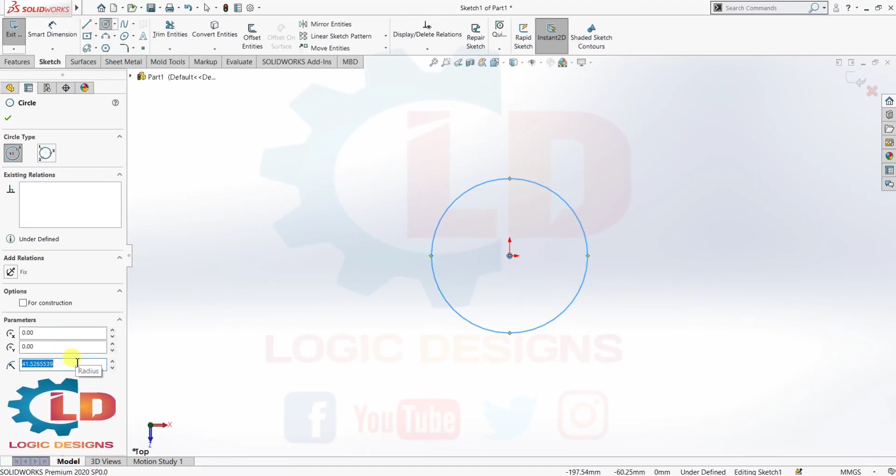Now we are back in the 3D modeling working interface. Select first the top plane, go to sketch and select the sketch option. Now select circle, first create one circle. Now put here dimension radius 32. Now using smart dimension, diameter is 64 mm.

Now create one center line from UCS. Put your smart dimension 41 mm, because we need a reference point to create another circle of 22 mm.

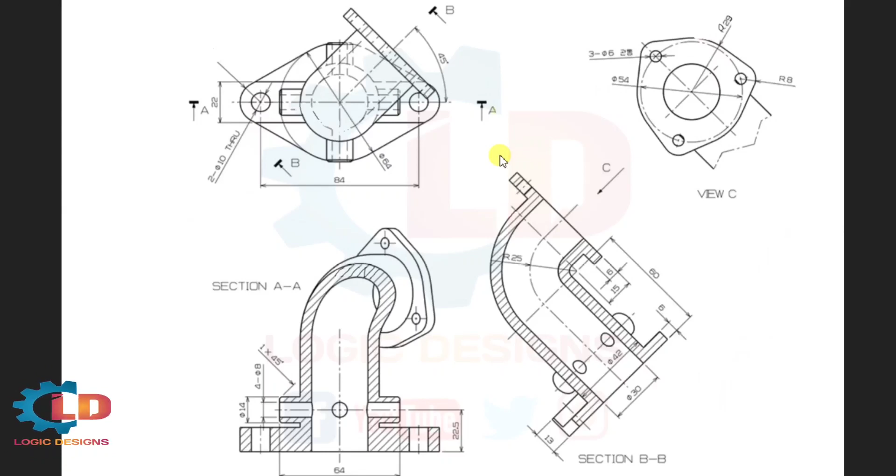Now let's move to the working interface and create one circle. Select circle first and select this point as a reference and put here radius 11 mm. Now go to smart dimension and put here diameter 22 mm.

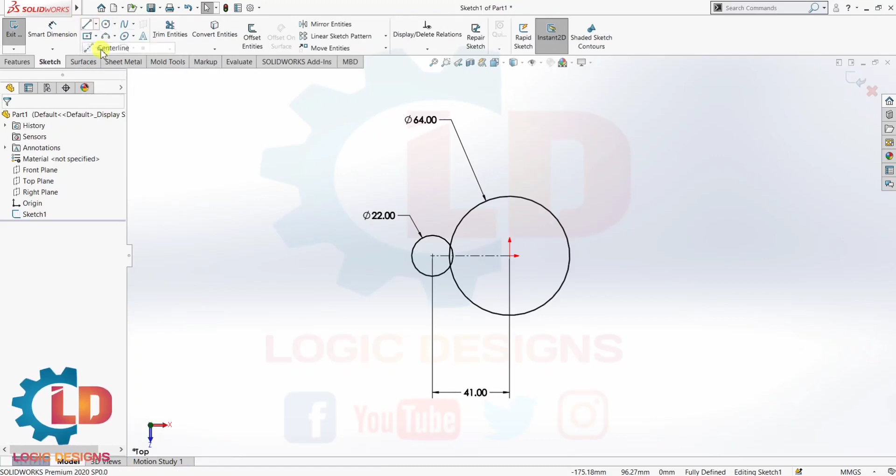Now select line, center line, and create one vertical center line for a reference.

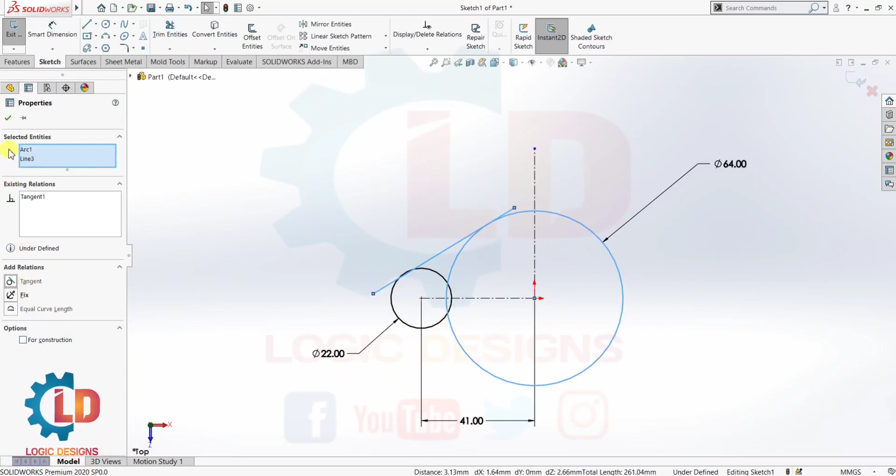Now adjust the dimensions. Here I am adjusting dimensions. Now go to line again for tangent. Select line and create one random line. Now hold this line and hold this circle and select tangent for a relation. Now select this line, select the circle, and select tangent.

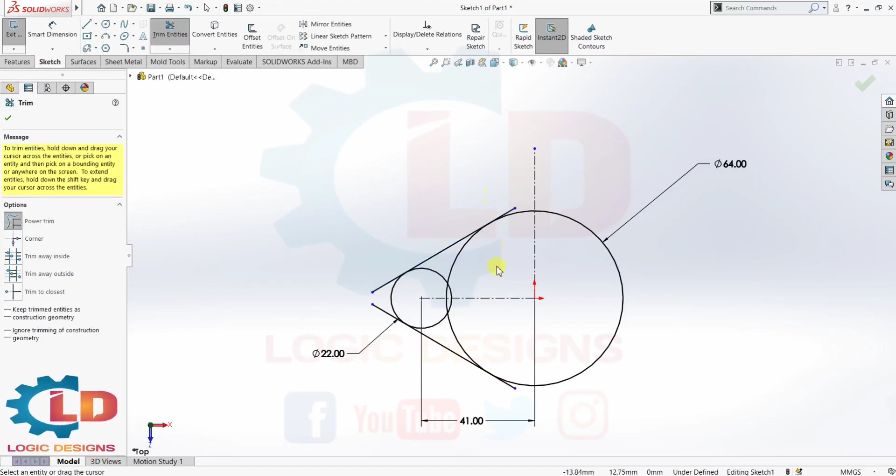Now the relation is added. Go to mirror entities, select this line, and mirror about the center line. Now trim out all unwanted area. Select trim and select the unwanted area.

Next, trim out the bottom side also. Now add relation to this blue line, because we need a fully defined sketch. Go to fully defined sketch and select this line. Now press OK, now our sketch is fully defined.

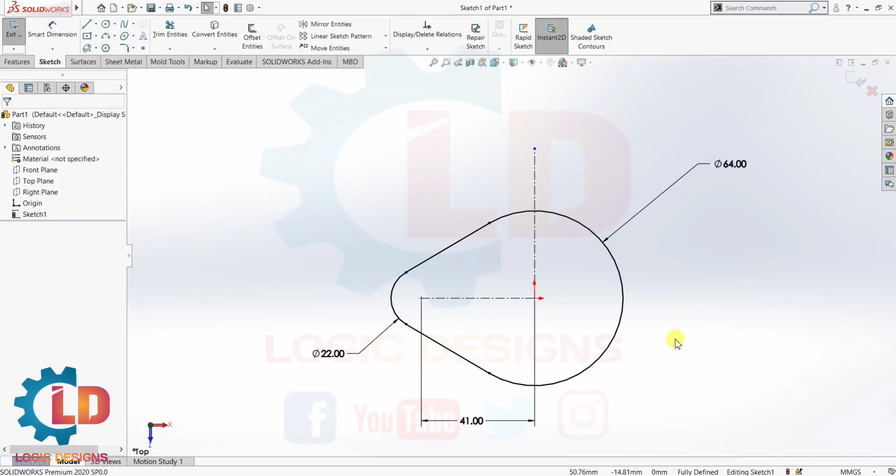Next, mirror all required area. Go to mirror entities and select all required area. Select these curves and lines and mirror about the vertical line. Now the portion is created on the other side of the vertical line. Now we have the bottom plate of this 3D model.

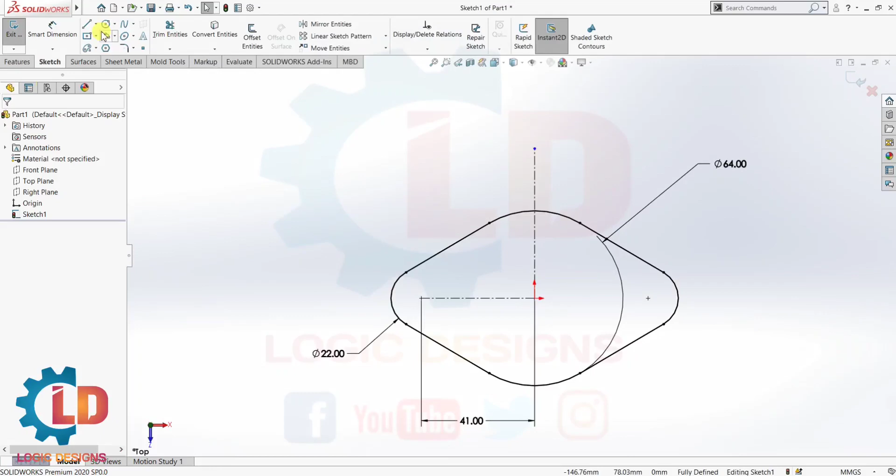Next, we need to create slots from this 3D model or base plate. Select circle and create one circle from UCS and put here 21 mm radius. Now go to smart dimension, select this circle, and dimension is diameter 42.

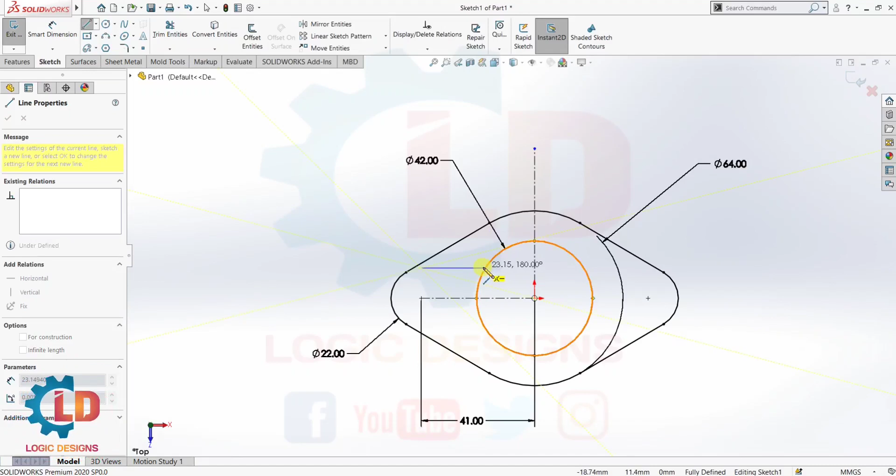Next, create one horizontal line, up to this circle. Now go to smart dimension, select center line and select this line, and put here dimension 11 mm.

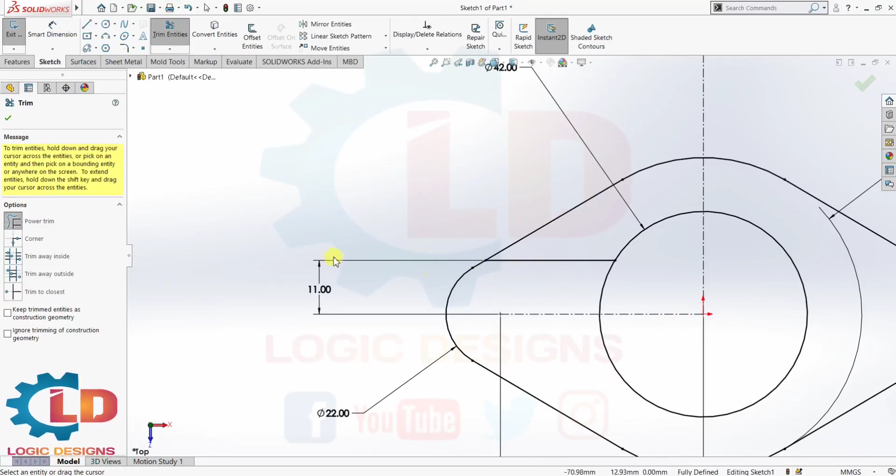Now extend this line. Now the line is extended. Now trim out this line. Next, mirror this line to the bottom side of the center line. Select this line, mirror about center line. Now the line is created on the bottom side also.

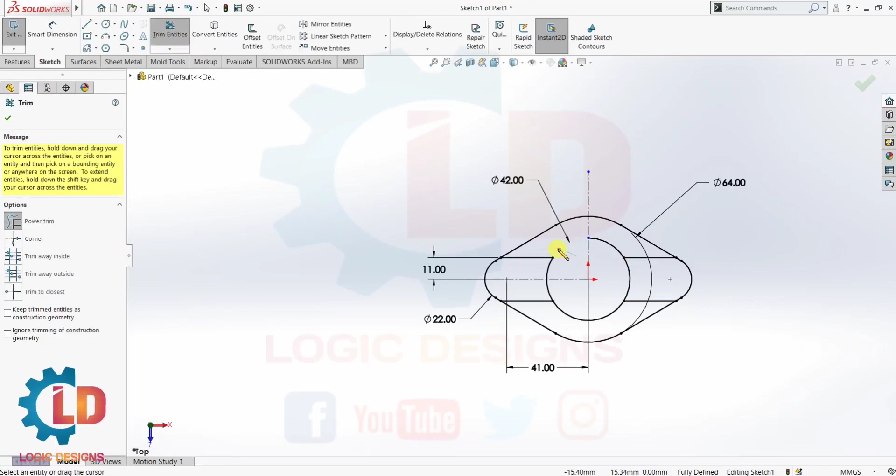Now again go to mirror entities. Select these two lines and mirror about the vertical line. Now the line is created on both sides. Now select trim and trim out all unwanted area. Now our base plate 3D model sketch is ready.

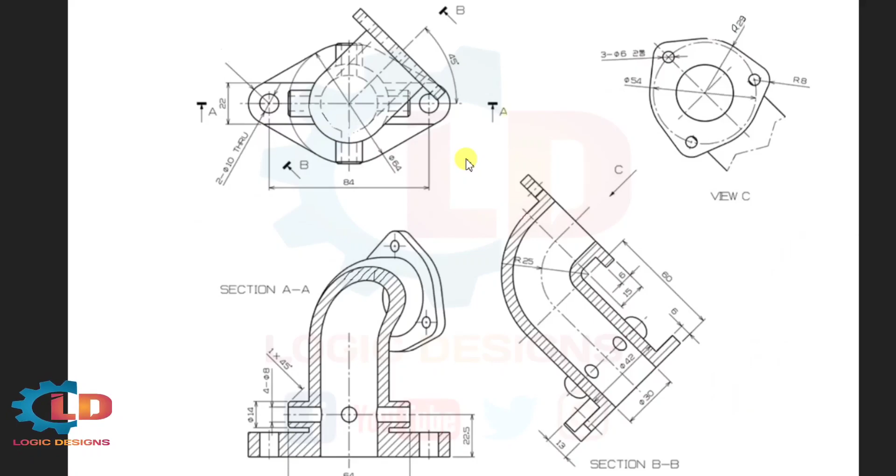Now we extrude this base plate in two parts. First part extrude up to 6 mm and second part extrude up to 13 mm. Let's check it out. First select features and select extrude boss base.

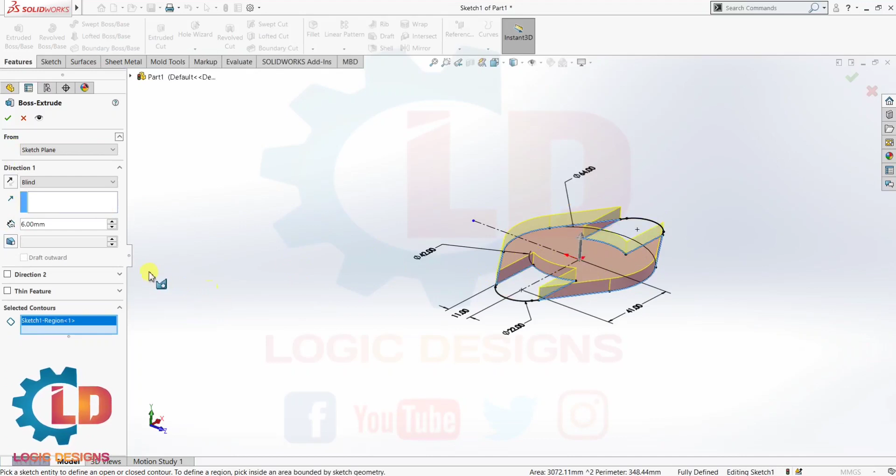In its contour select the center part, select this one and put here 6 mm distance. Here I am putting 6 mm distance. Click on OK. Now next we need to activate the previous sketch to extrude up to 13 mm.

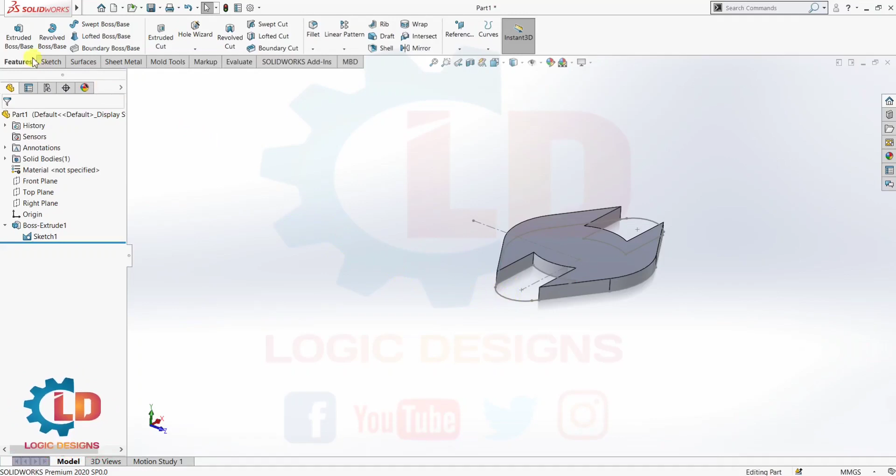Before that, go to the tree and select sketch 1 and select show sketch, select this eye icon. Now the previous sketch is shown. Now select extrude boss base and select this curve. Now this is randomly selected, so go to the sketcher tool and delete this one.

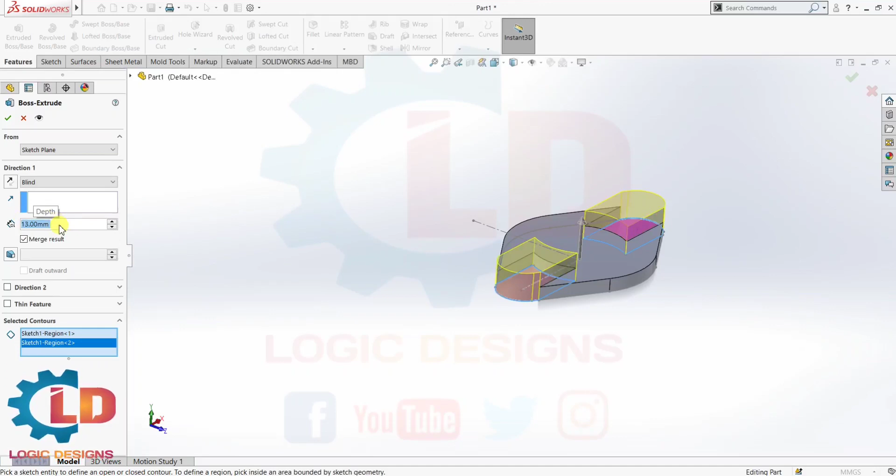Now select manually these two portions and put here 13 mm distance. Now our base plate is created. Now hide this sketch. You can see here our base plate.

Next, we need to create this elbow. The angle is 45 degrees, clearly visible in the top view. For creating this elbow type, we need a new plane, and please read all drawing annotations or dimensions before creating this elbow. This is a hollow tube elbow, clearly visible in section views.

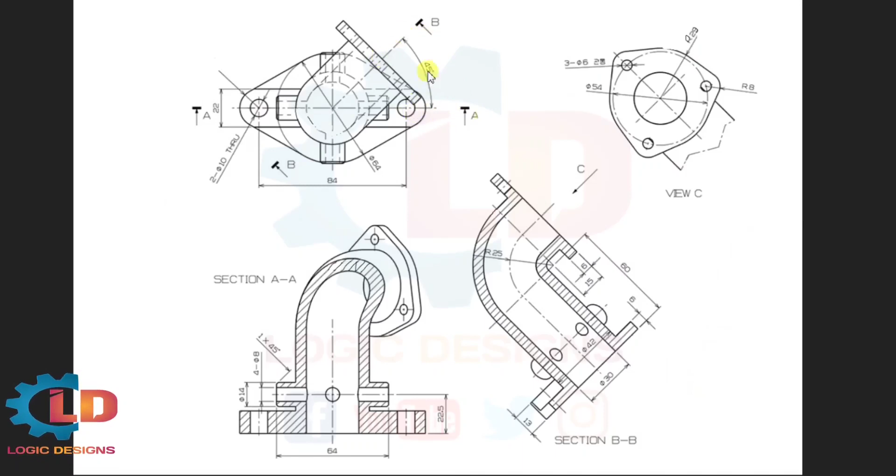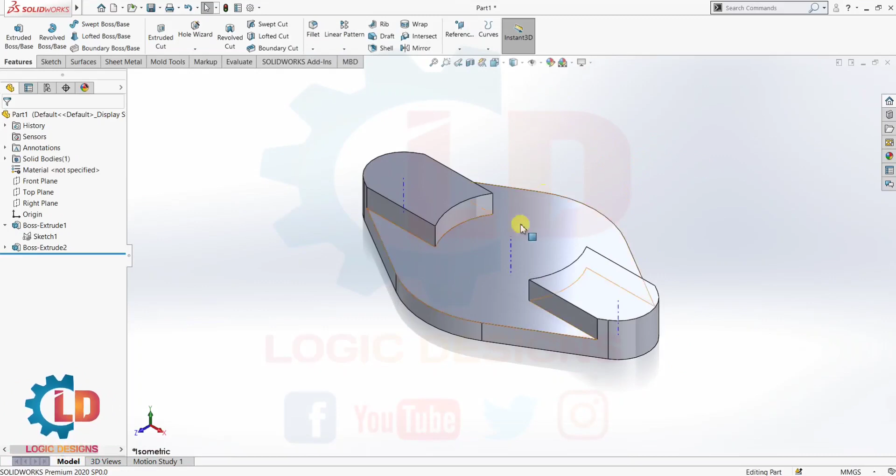Now here I am creating this elbow hollow tube on a new plane. Select this eye icon and select view temporary axis. Now the temporary axis is visible in our 3D model. Now go to reference to create a new plane.

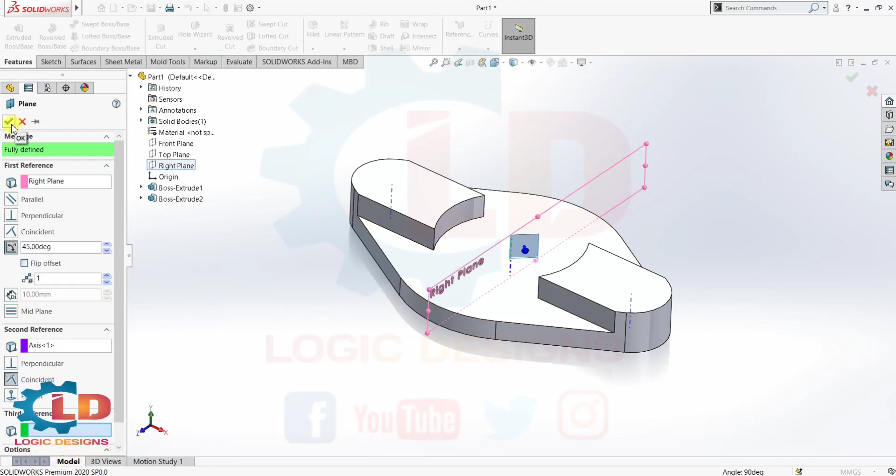Reference new plane. Put here references. Select right plane first and put 45-degree angle. In the second reference, select this vertical temporary axis. Now plane is visible. OK, now plane is created at an angle of 45 degrees.

Now extend these points. Here I am extending these points to clearly visualize this plane on the 3D model.

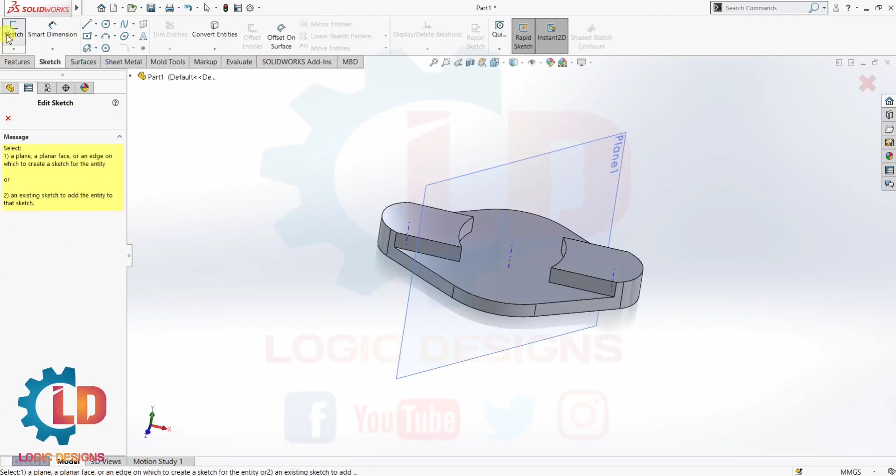Now go to the sketch. Select this plane, now sketch is activated. Put Ctrl+8 for normal view. For proper viewing angle, we need normal to view.

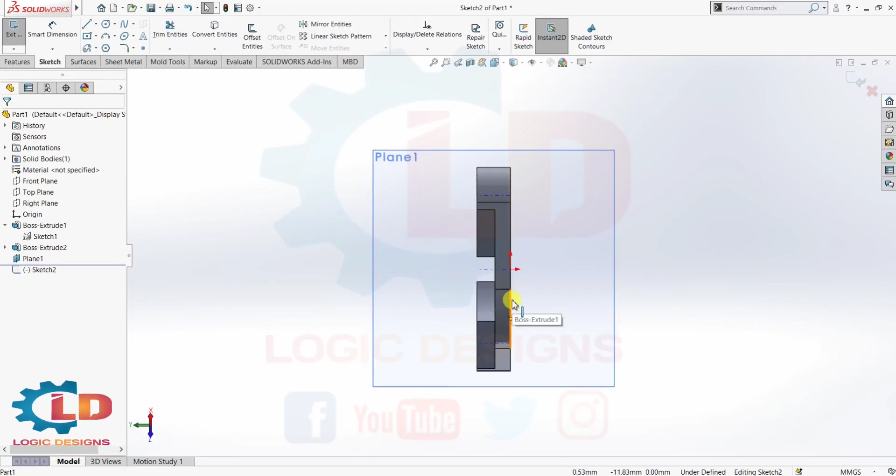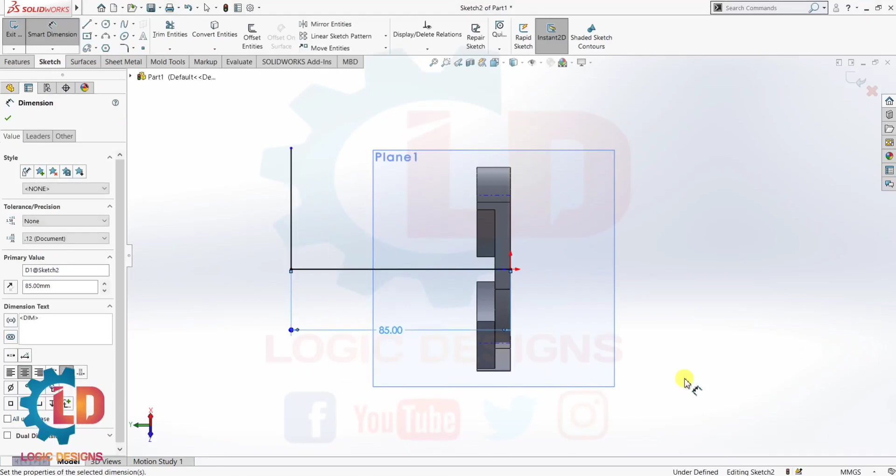Now select line, line is selected. Now create line from UCS, create one horizontal line and one vertical line. Now go to smart dimensions and put dimensions here. As per our 3D model, horizontal distance is 85 mm and vertical distance is 40 mm. Put here 40. Now our sketch is fully defined.

Now select sketch fillet and select this line, put here 25 mm radius. Now create this elbow section.

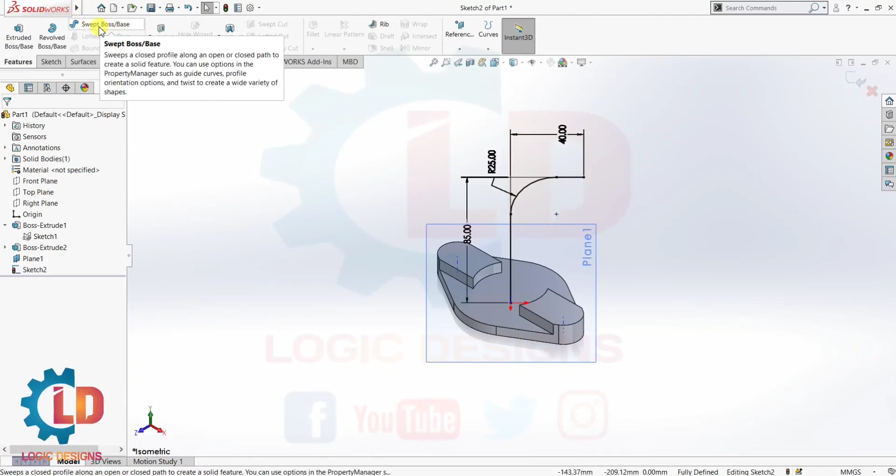For that we need to use the sweep command for creating this elbow. First adjust the viewing angle and go to features, select swept boss base. Now sweep is activated, for profile and path select circular profile, and select the path, this line. Now put your diameter 42 mm as per our drawing. Now sweep is created on a base plate.

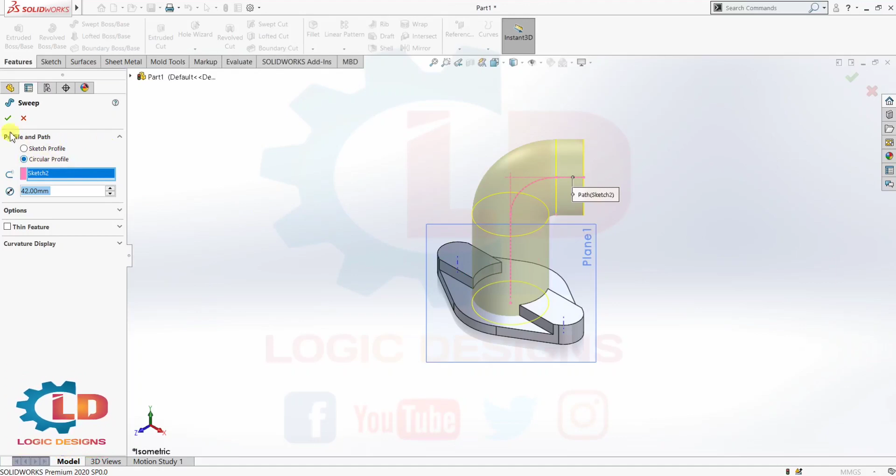Done, this is our elbow at a 45-degree angle. Now you can see the elbow is created in a solid state, but as per our drawing the elbow is hollow.

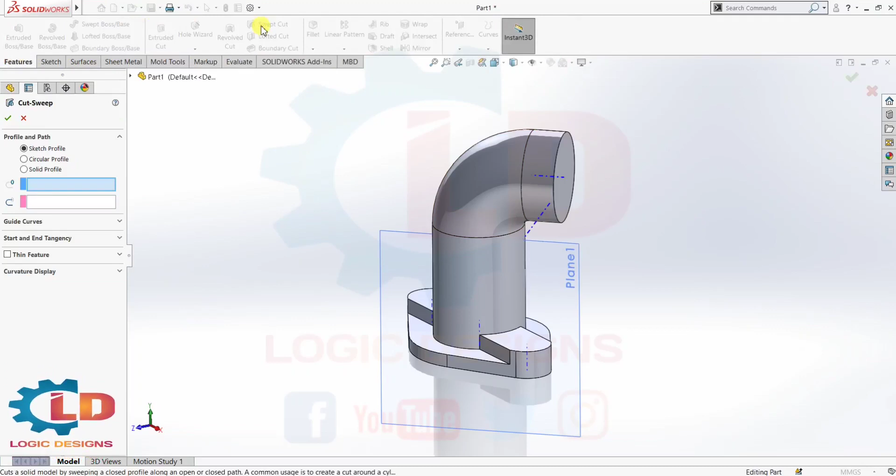So for that we need to use swept cut. Go to features, select swept cut. Now again profile and path, select circular profile and select path.

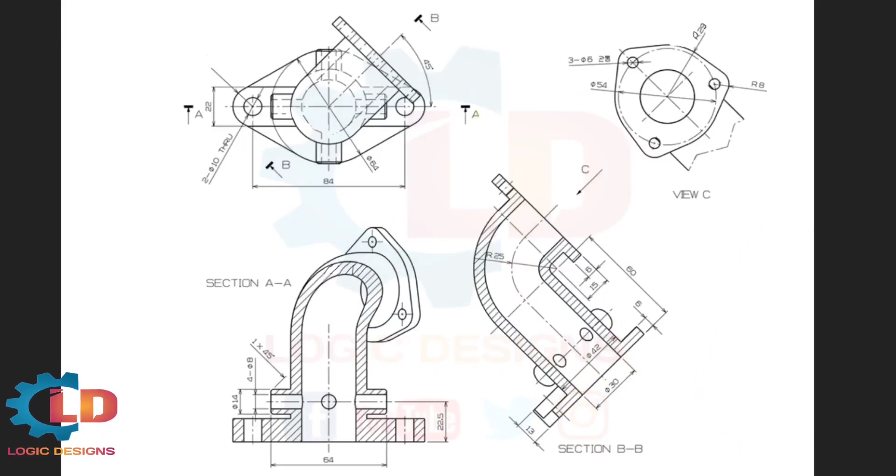Go to the tree and select sketch 2. Now swept cut is activated, put here diameter 30 mm. Now you can see the solid tube is converted into a hollow tube.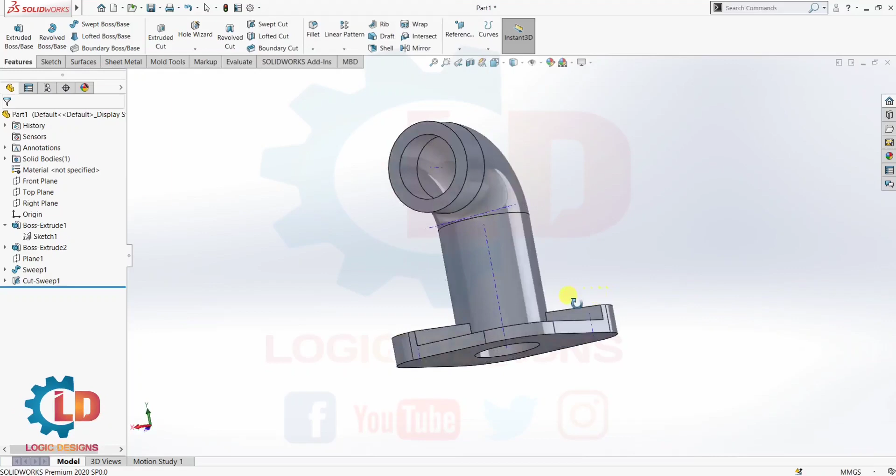Next, we need to create the front side of this elbow. Select this front face of the hollow tube and sketch on it. Now press Ctrl+8 for normal view.

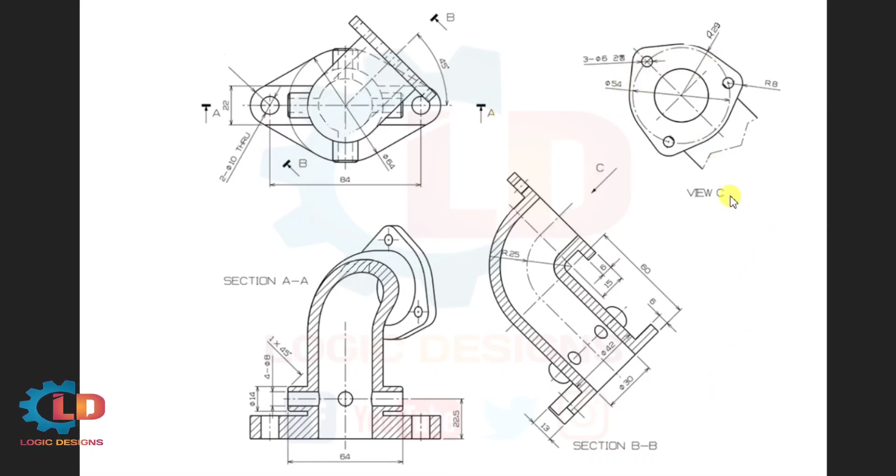Now create one circle of radius 29 mm. Read all drawing annotations and dimensions from the drawing to avoid errors.

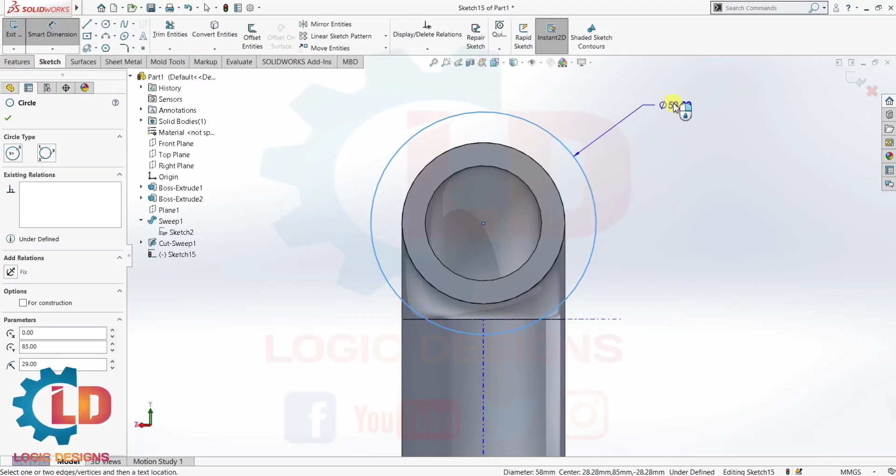Now go to SolidWorks, select circle, select the center point and create one circle. Put here dimensions, 29 mm radius. Go to smart dimensions, diameter is 58 mm.

Next, we need one reference circle. Select circle, create one circle and check this for construction, put here dimension radius of 27 mm. Now smart dimension, diameter is 54 mm.

Now sketch is fully defined. Next, we need center lines. Create one center line up to the reference circle.

Next, create one circle and put here radius 8 mm. Go to smart dimensions and put here diameter 16 mm.

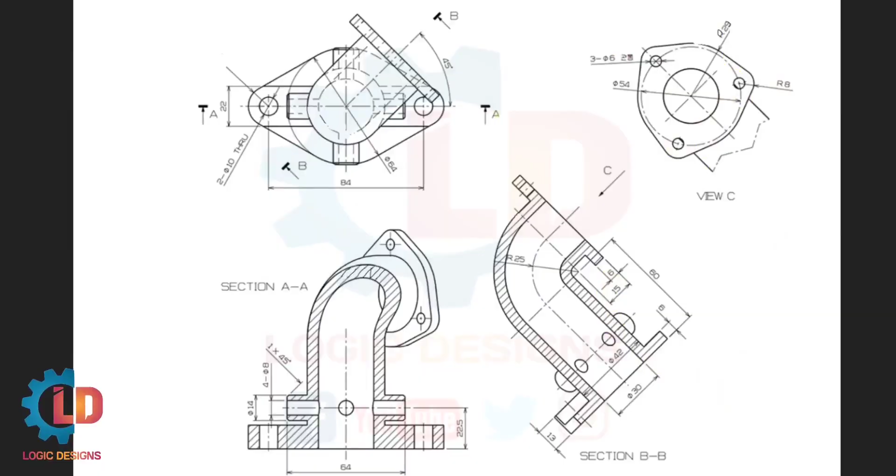Now create another two circles as per our drawing. For that go to patterns, select circular pattern. In parameters, select the center point.

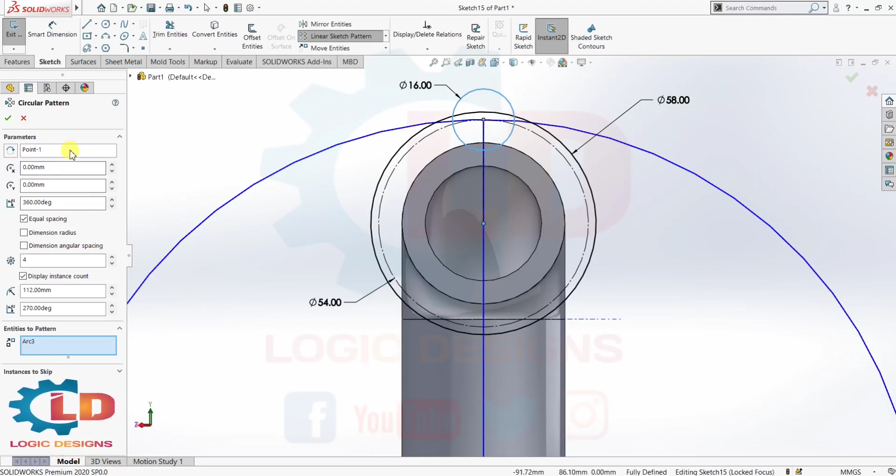And entities, select this circle. Select points carefully, here I am selecting point 1, and put 3 circles. We need 3 entities, 1, 2, 3.

Now go to the relations to define the position of the circle. Go to display relations and select fully defined sketch. Select the 2 circles and OK. Now sketch is fully defined.

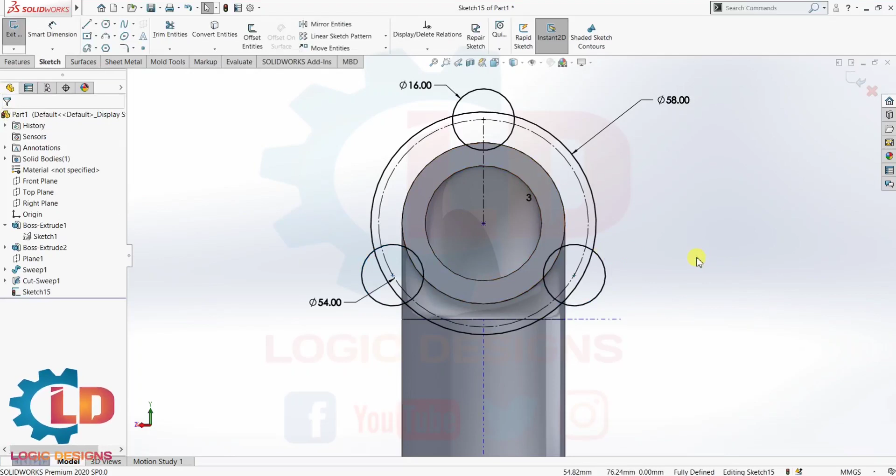Next, we need to create tangent lines. For that we need to select line. Here I am selecting line, create one random line.

Now hold this line and hold this circle to add relations and select tangent. Again hold this line and select the circle and tangent. Now relation is added. Next, trim out all unwanted areas.

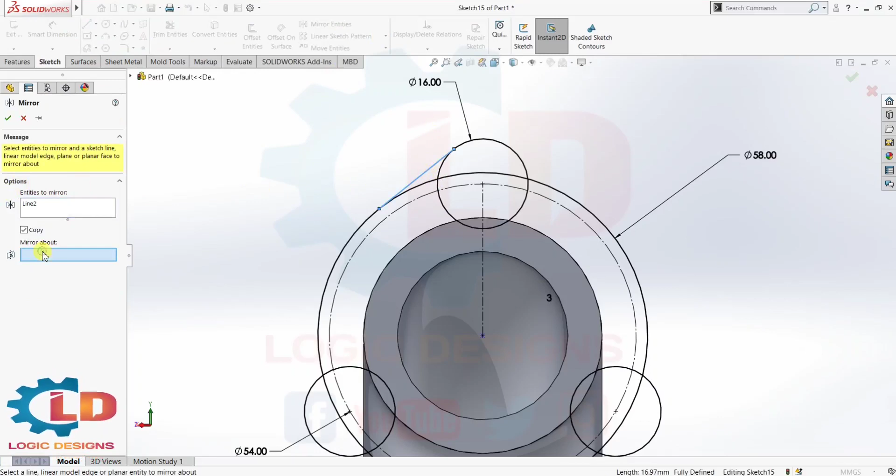Now mirror this line on the right side, select this line and mirror about, select the vertical center line.

Next, we need to create another line at the bottom side. For that go to line, create one random line and hold this line and hold this circle and select tangent.

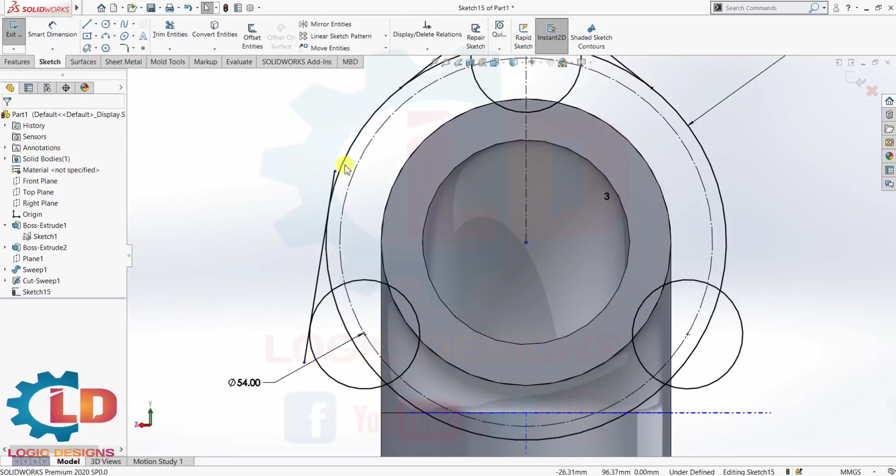Next, select this line, select the circle and tangent. Now trim out all unwanted area. Zoom in, trim out this line, this portion also.

Next, select again line, create one random line. Now add relations, select this line, hold this circle and select tangent. Again hold this line, select this circle and tangent. Now trim out this portion and this portion.

Next, we need to mirror those lines on the right plane or right side. Select mirror, select these lines and mirror about the vertical center line.

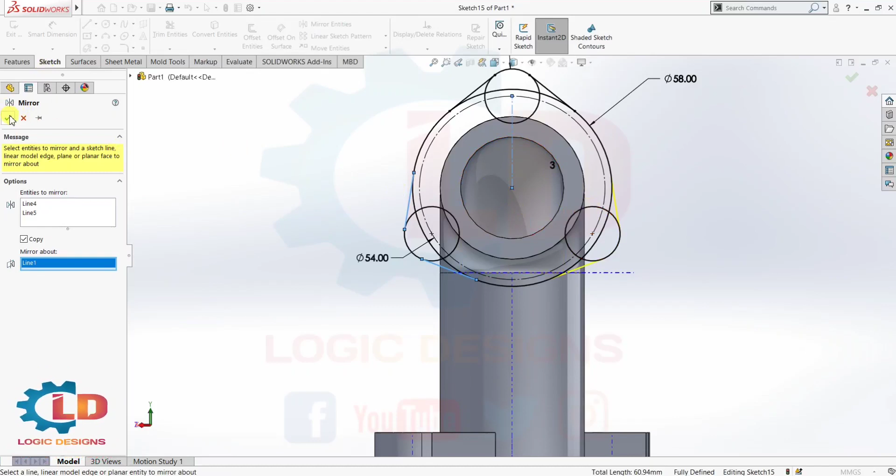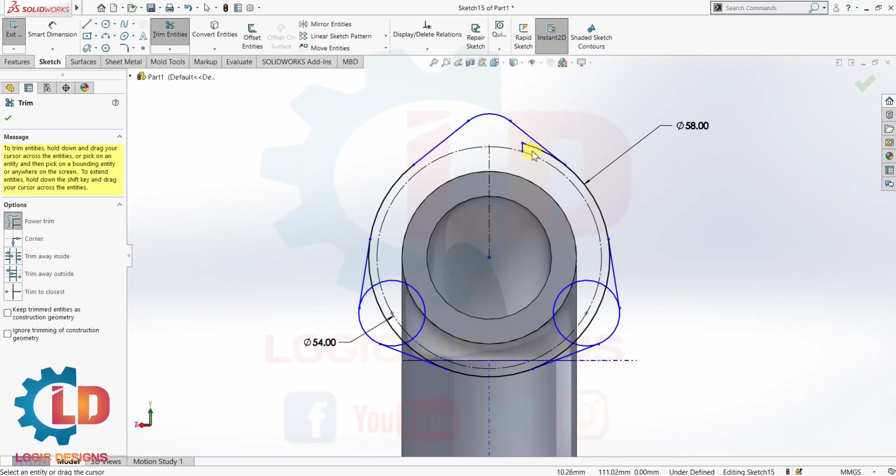Now trim out all unwanted area. Select trim and select required portions for trimming out. Trim all unwanted area. Select those lines for trimming out.

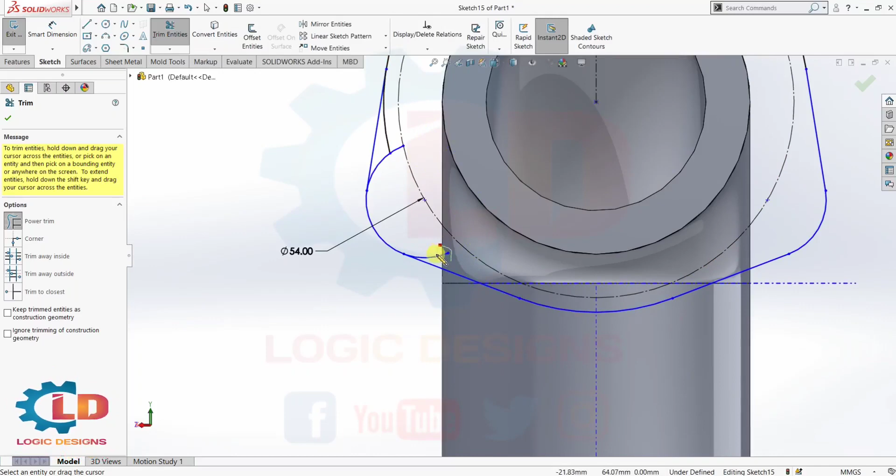Select this portion, this portion, one remaining arc. Next one, this portion also. Select this one. Now one arc is remaining on the bottom side, so again go to the trim command, select trim command and trim out this arc.

Now trimming is done. Now again we need to add relations, because of trimming out, all relations are deleted. I can see here the moving on a vertical side. For that we need relations.

Ctrl plus Z button for the original drawing or sketch. Go to extend entities and select this line.

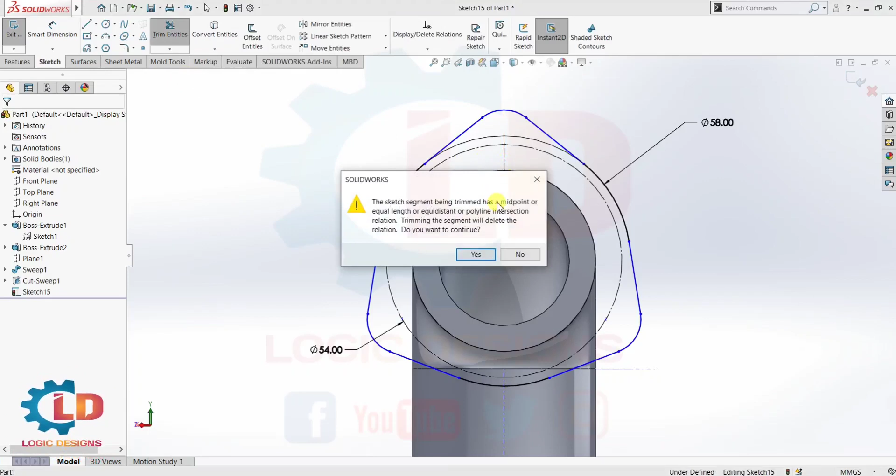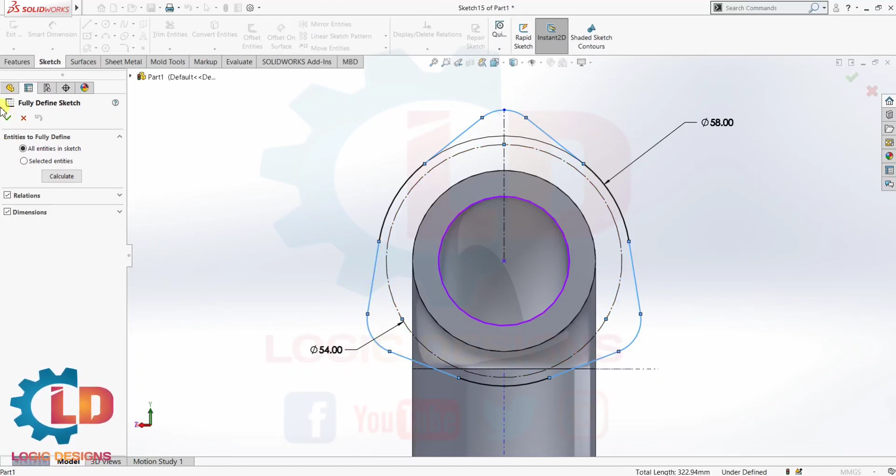Next one, go to Display/Delete Relations, select fully defined sketch and select all blue lines. Select this line, select this line, this one. Now our sketch is fully defined.

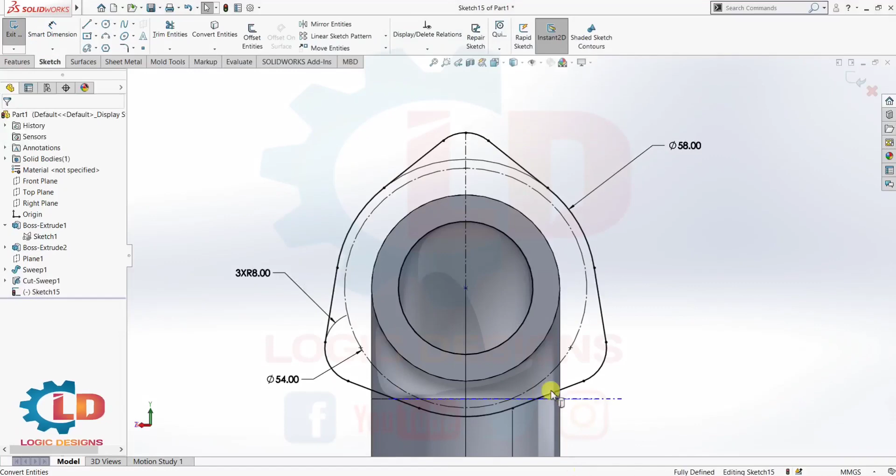Go to features and select extrude boss base, extrude up to 6 mm, put here 6 mm. On the reverse direction, put first 6 mm. Done.

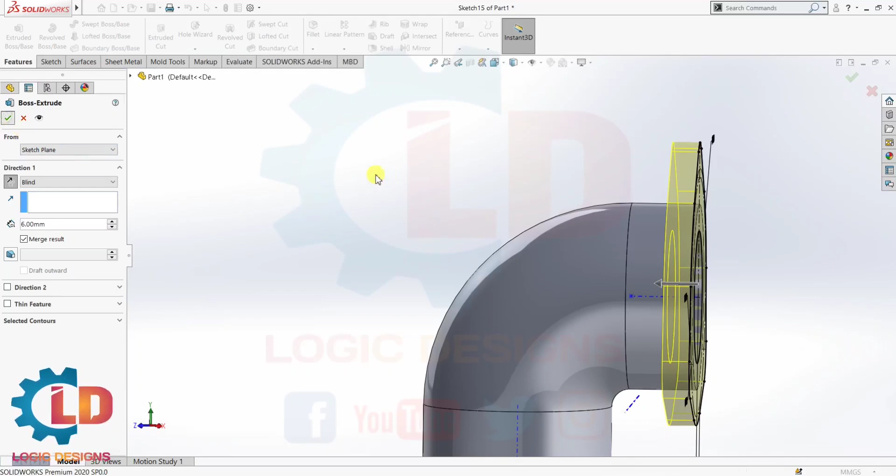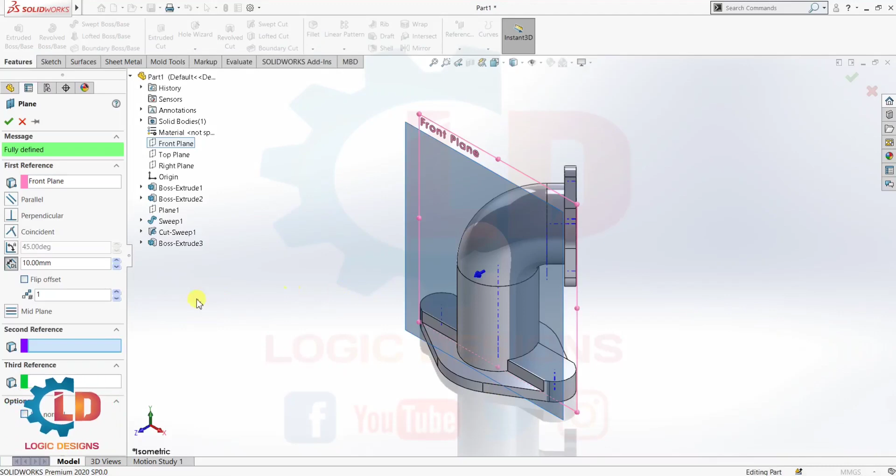Next one, we need one reference plane. Go to reference plane. In the first reference select front plane, and put your distance as per our drawing. Go to the drawing and see here total distance is 64 mm, that means the distance is 32 mm, half of this portion, 32 mm. Now plane is created.

Now sketch on it, select the sketch, select this plane and Ctrl plus 8 button for normal to. Now create circle on this plane as per our drawing.

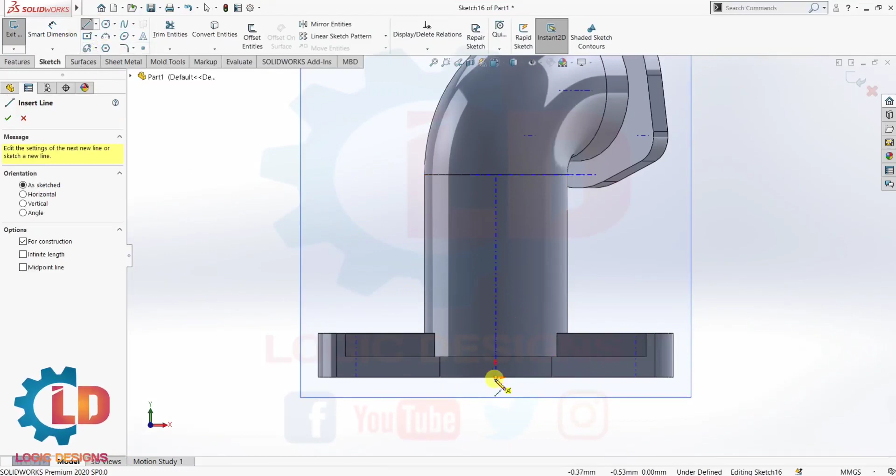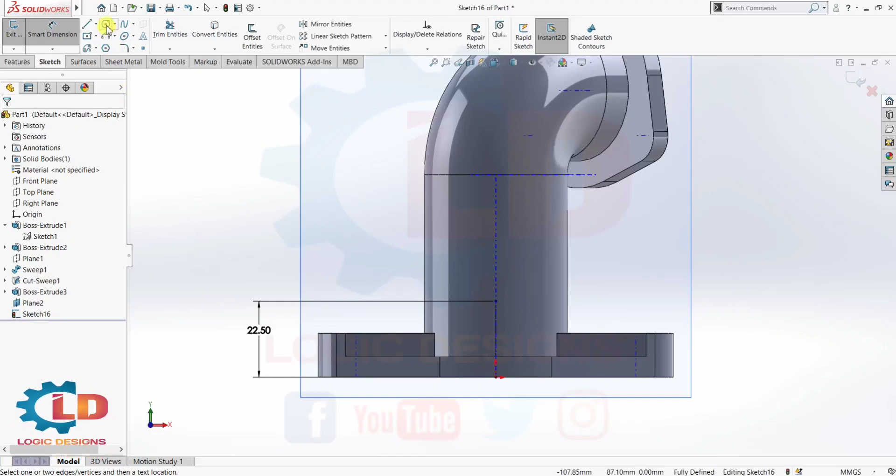I can see here in section AA, smart dimensions, put a dimension 22.5 mm. Next one, create one circle, 14 mm, put here radius 7 mm. Now go to smart dimensions, put here 14 mm.

Now sketch is fully defined. Now extrude this portion, up to elbow face.

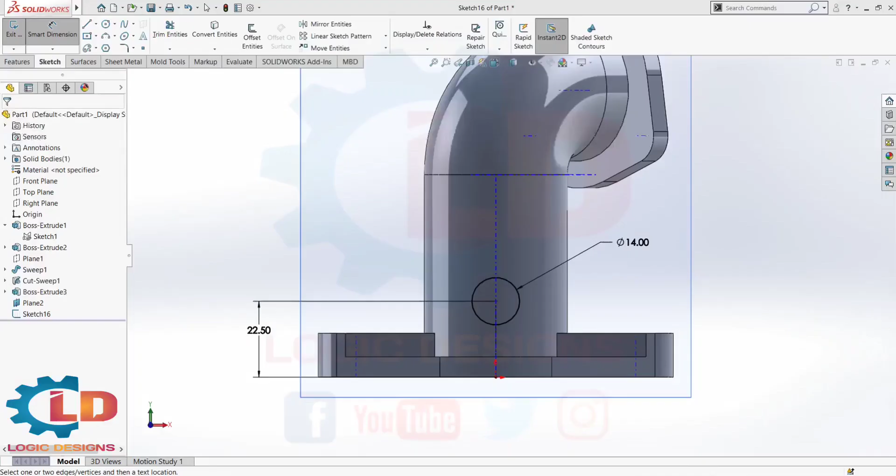Now go to features, select extrude boss base, the circle is automatically selected. Change direction towards elbow face and select up to surface, select elbow surface.

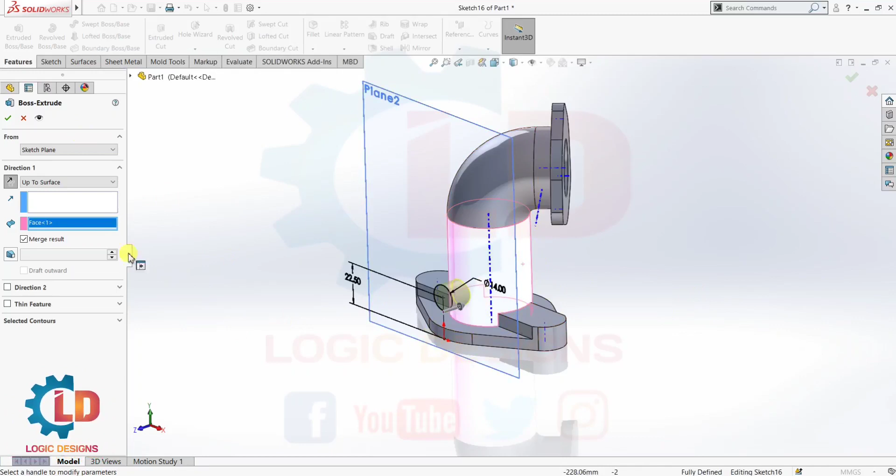Done. Now circle is extruded up to elbow face. Now hide this plane, I can see clearly.

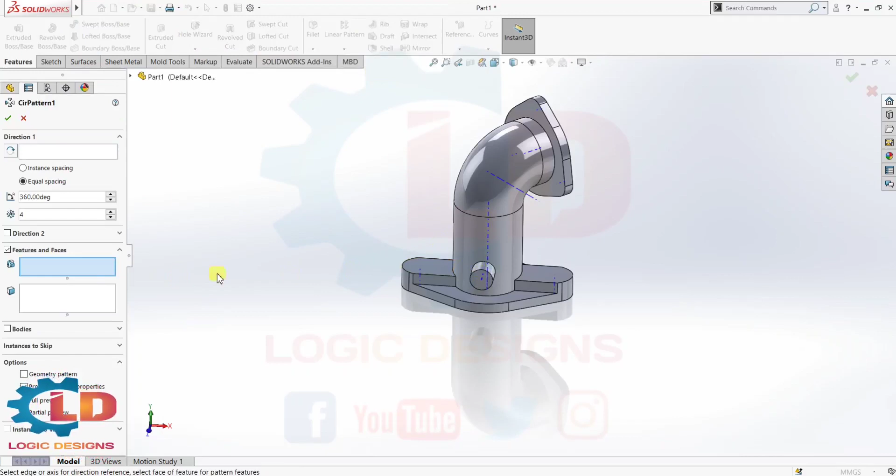Now pattern this circular portion. Go to features, select patterns, circular pattern. In features, select this circular portion, and for direction, select axis 1.

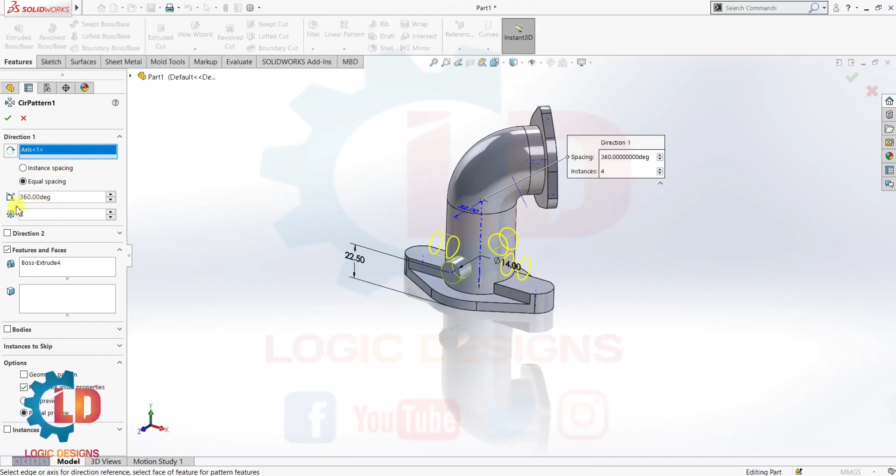Now you can see here circular pattern is done, all 4 versions are created with equal spacing. Done. Now you can see here clearly the circular pattern.

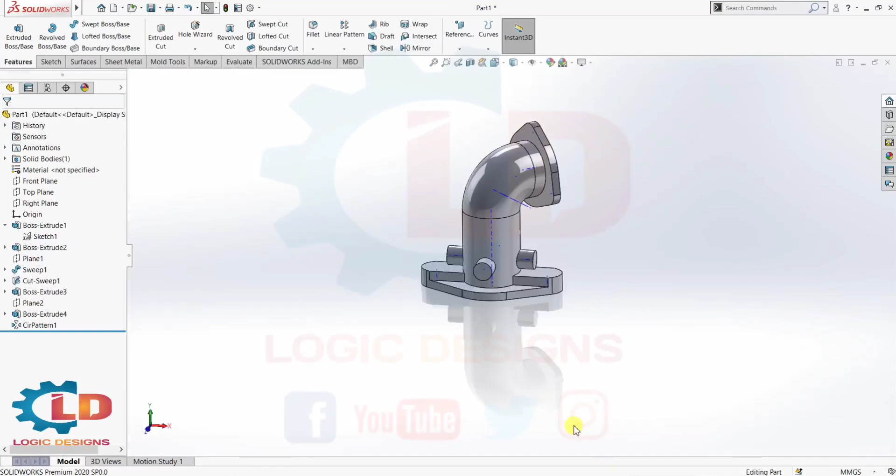Done. Now our 3D model is almost completed. All remaining holes are created by only hole wizard. For that we need to create all holes from the hole wizard. First of all, we are creating this hole on the bottom plate.

Now go to the hole wizard and select hole type, third type. In standard ANSI Metric type, dowel holes, size is 5-10 mm, and end condition through all.

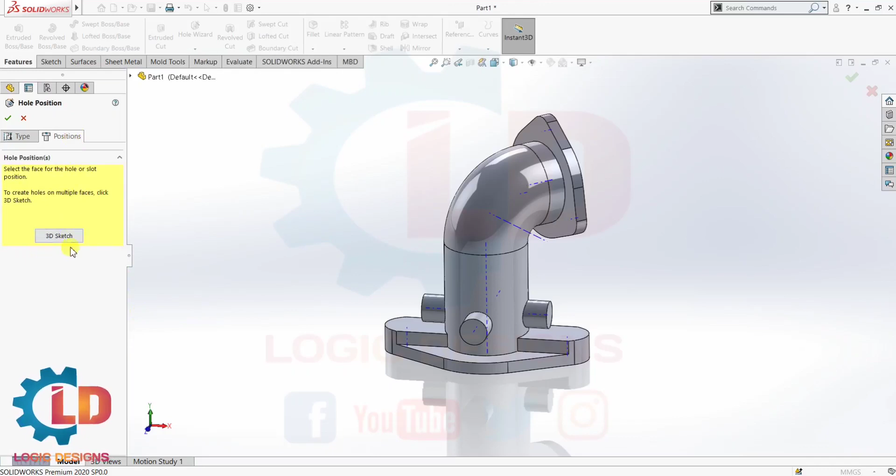Now go to position and select 3D sketch. Select center points, now activate center points, this one and this one. Wait for a few seconds because hole is not created because the temporary axis is visible.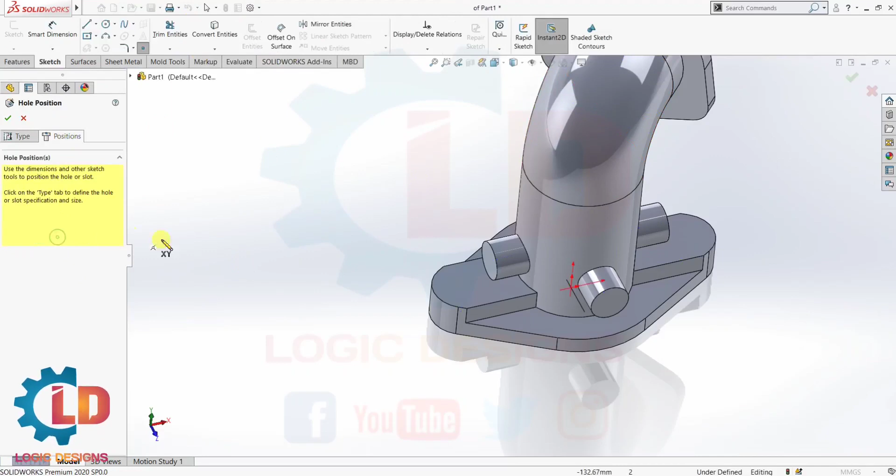For that, disable all temporary axis, go to the eye icon and disable all temporary axis. Now again go to hole wizard, go to position, 3D sketch, set these points, this point also. Now hole is created of Ø10 mm. Please always hide all temporary axis.

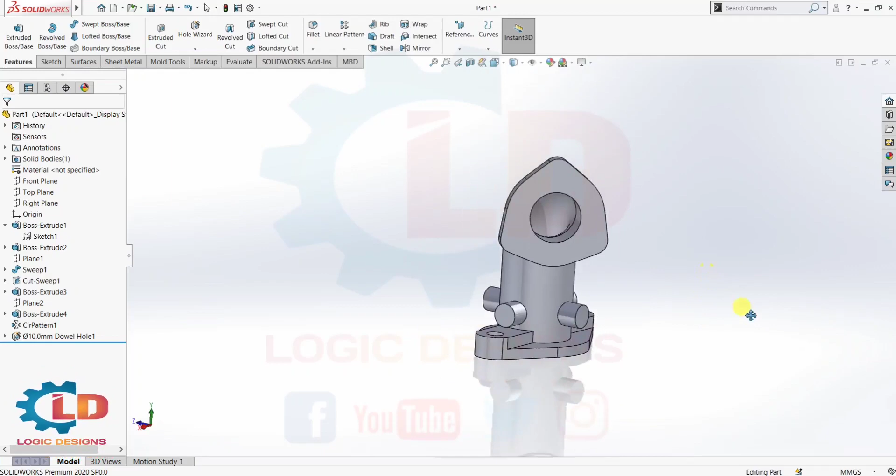Next one, holes on all 4 patterns. For that, go to hole wizard. Zoom in, select this third type, in standard ANSI Metric, dowel holes type, and end condition 20 mm, size is Ø8 mm.

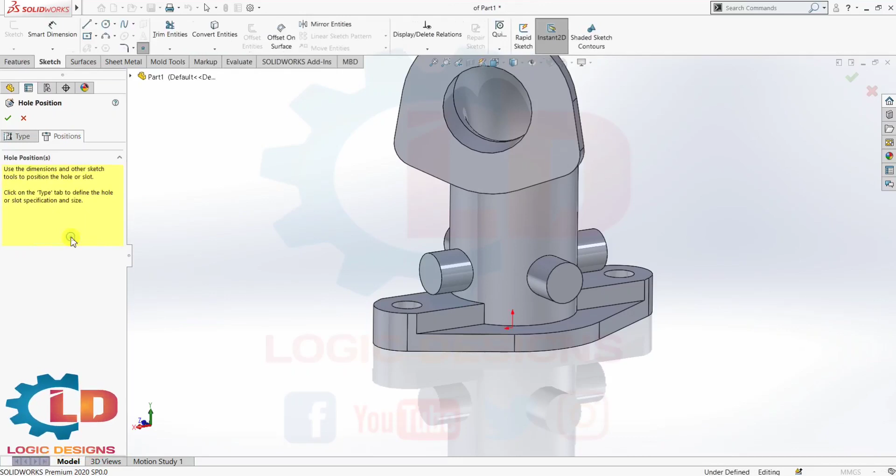Next one, go to position. Select 3D sketch and select centers of all 4 patterns. Rotate this one, select this center point also. Done.

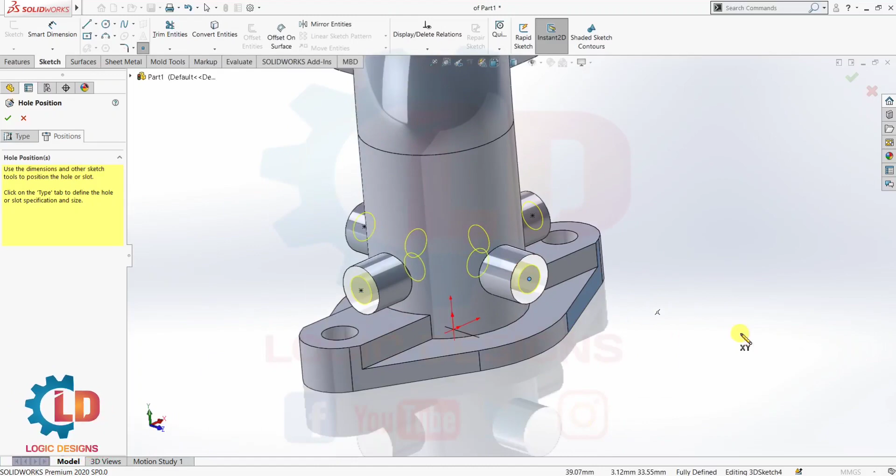Now all 4 holes of Ø8 mm are now created. You can see here from a bottom view.

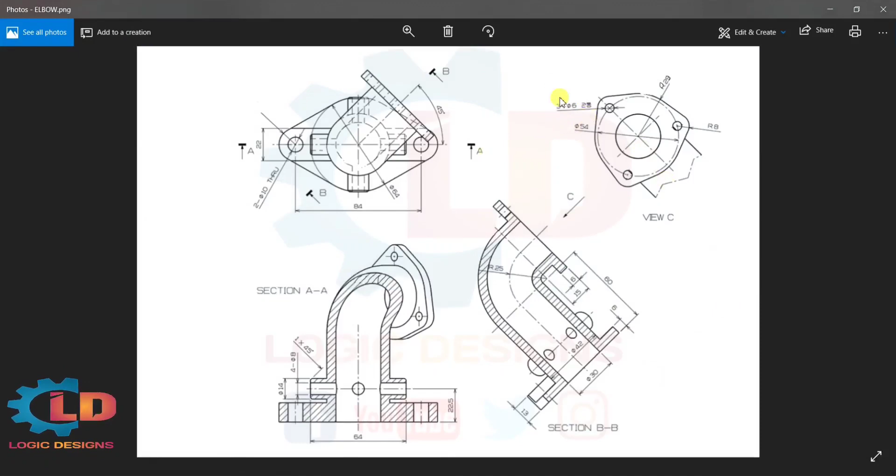Next one, we need to create holes on this top face, top face of this elbow. Now go to hole wizard for creating Ø6 mm holes.

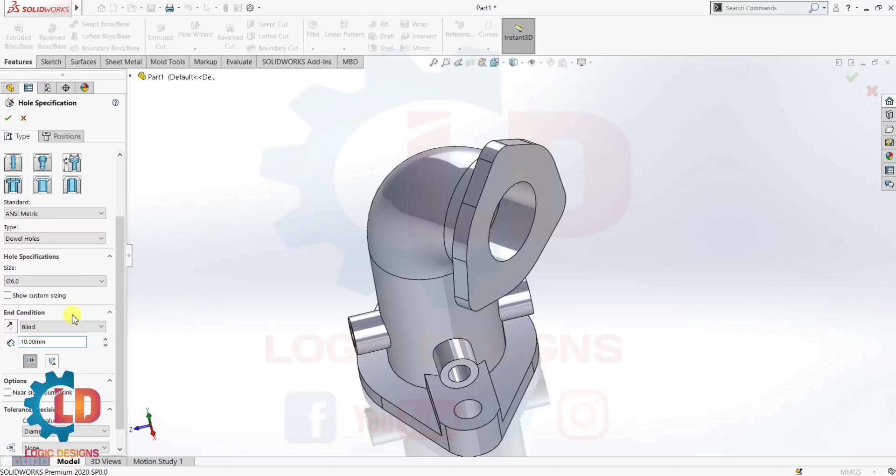Now hole wizard, select this type, third type, dowel holes Ø6 mm, and end conditions. Here I am putting 10 mm distance. Now go to positions, select 3D sketch and select all 3 points. Go to this arc to activate these points.

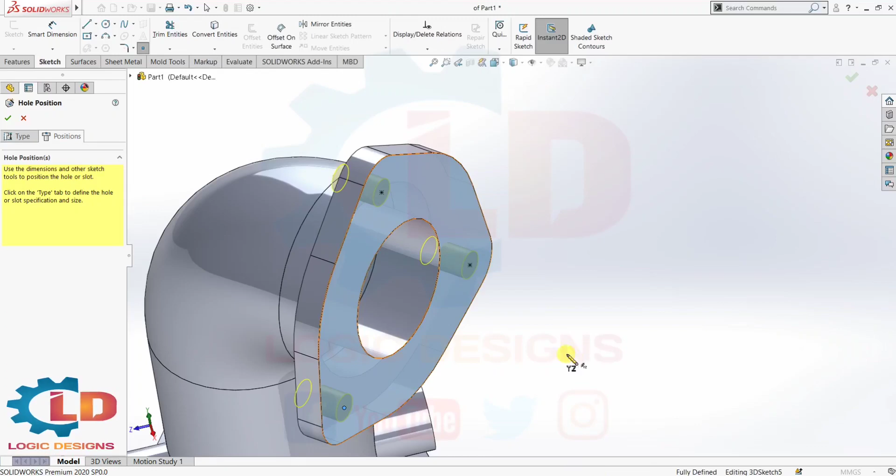Now the arc, one point is visible. Now done. Now you can see here all three holes are created into the top face of the elbow.

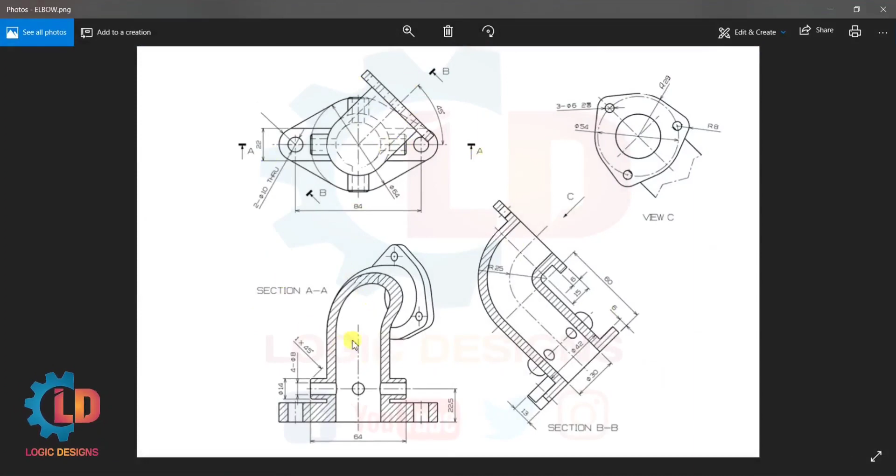Now you can see here clearly our 3D model is now created, but one chamfer is remaining of 1 mm distance at a 45-degree angle. Go to chamfer and select all 4 edges.

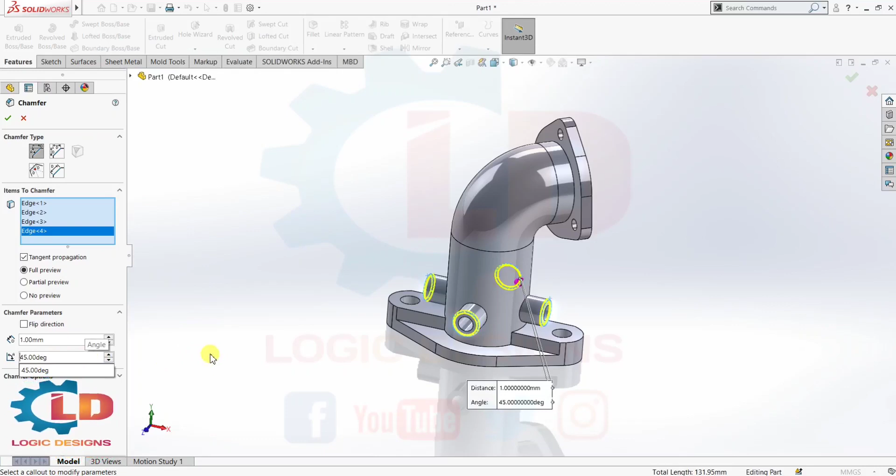Select these edges, here I am selecting all 4 edges. Now put here distance 1 mm and angle is 45-degree. Now chamfer is activated. Now OK.

I can see here our 3D model is completely done as per our drawing. That's it, class. This is our today's video tutorial of this industrial component. I hope now you can understand how to draw this component in SolidWorks 3D.